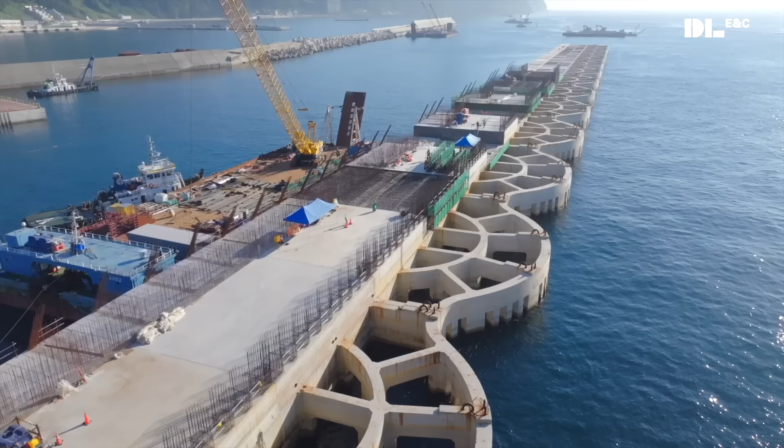Connected to Sadong Port in the south, the airport will be just an hour's flight away from anywhere in Korea, making day trips to and from Ulleungdo a reality. Visitors will have easy access to its pristine beauty, while locals enjoy greater convenience in their daily lives.

But it won't be easy. Ulleungdo is a volcanic island surrounded by steep cliffs that plunge into the sea. It's one of the most challenging terrains for construction work. So how can they possibly build an airport here? The solution came from DL E&C. Lee Soo-hyung is one of the designers behind the plan.

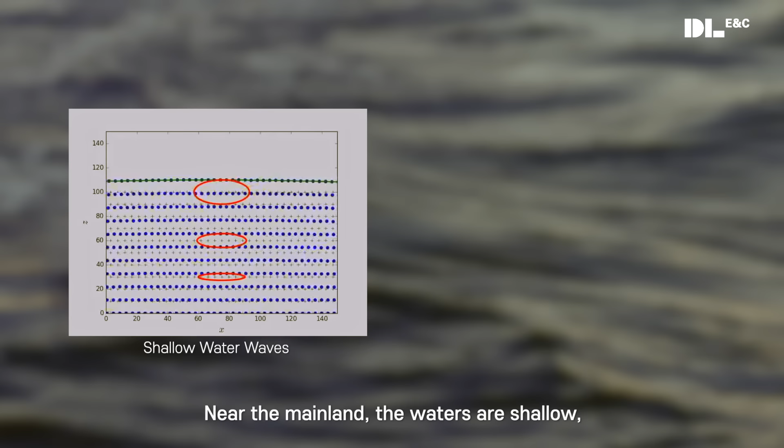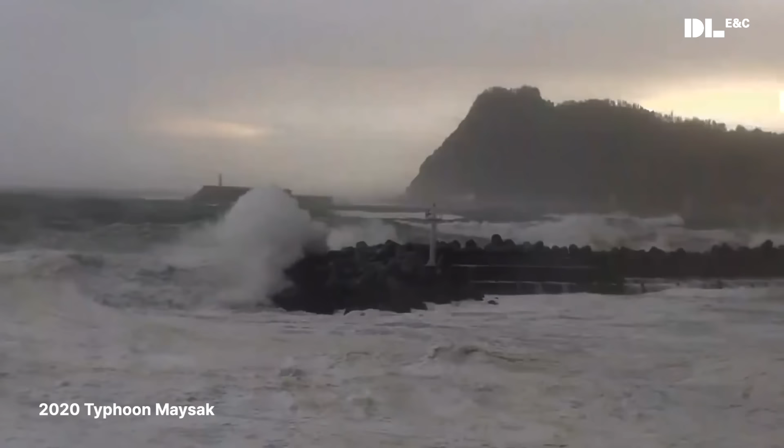This became apparent during the 2020 typhoon when Ulleungdo saw the highest recorded waves in 100 years.

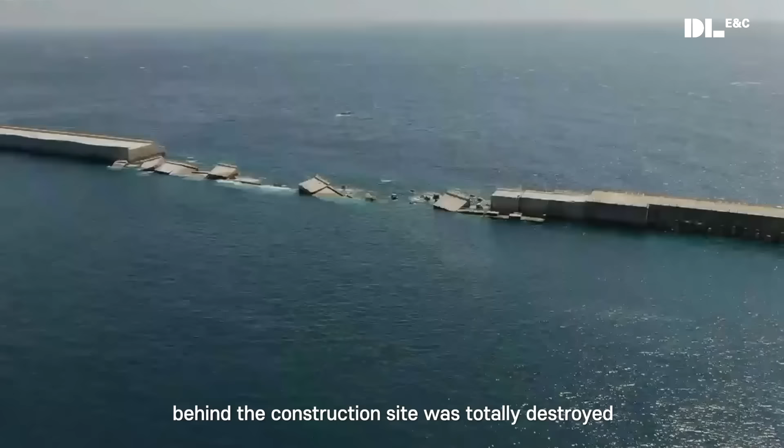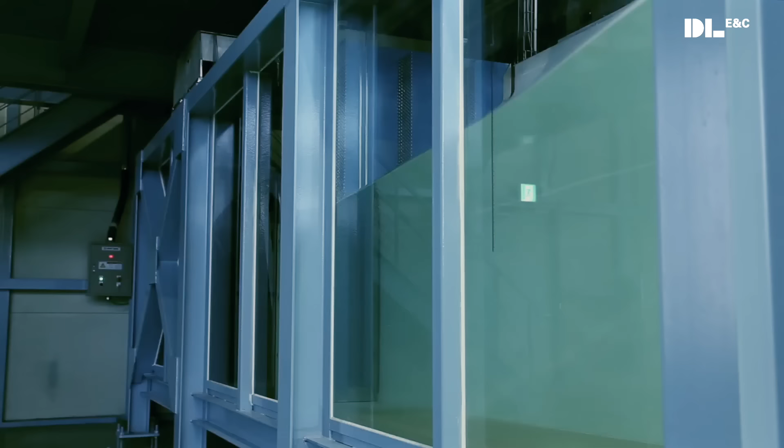The waves swept a 50-ton tetrapod inland, blocking a tunnel. Plans had to account for Ulleungdo's uniquely challenging topography. The design team conducted seawater model tests to develop defenses capable of withstanding massive waves.

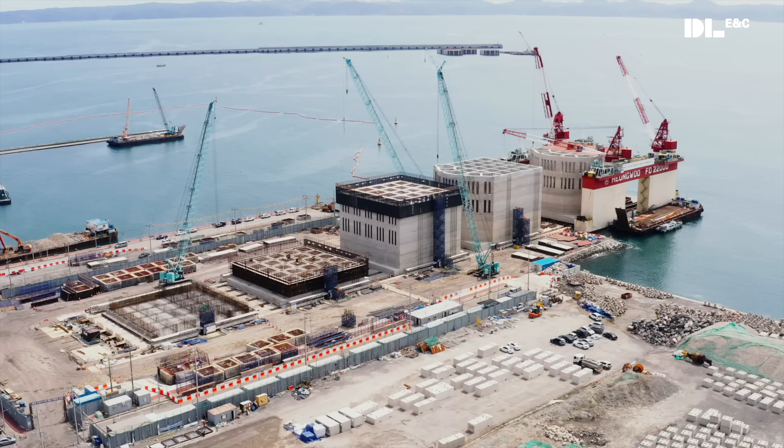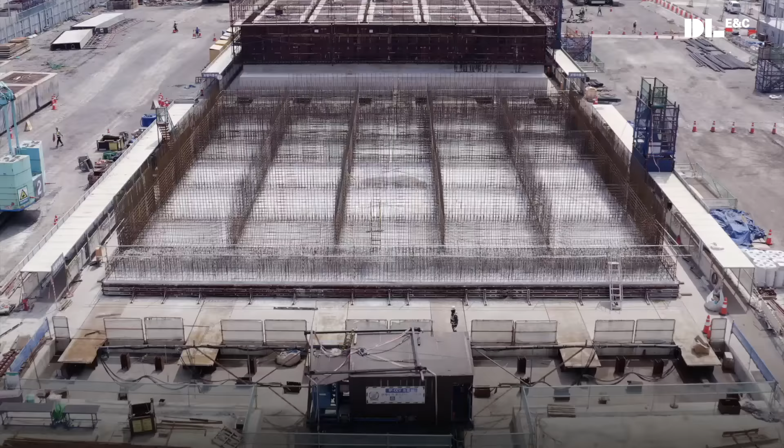Yeongilman, Pohang. This is where the caissons designed to withstand such massive waves are built. A caisson is a concrete structure used in port construction. Ulleung Airport will require a total of 30, with the largest equal to the size of 3 10-story apartment buildings.

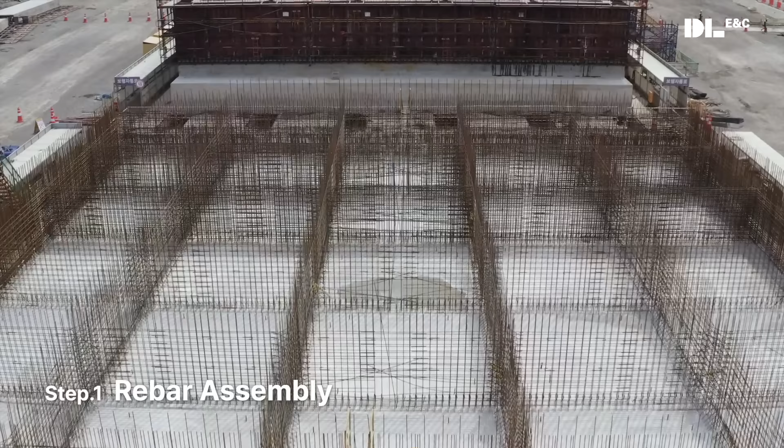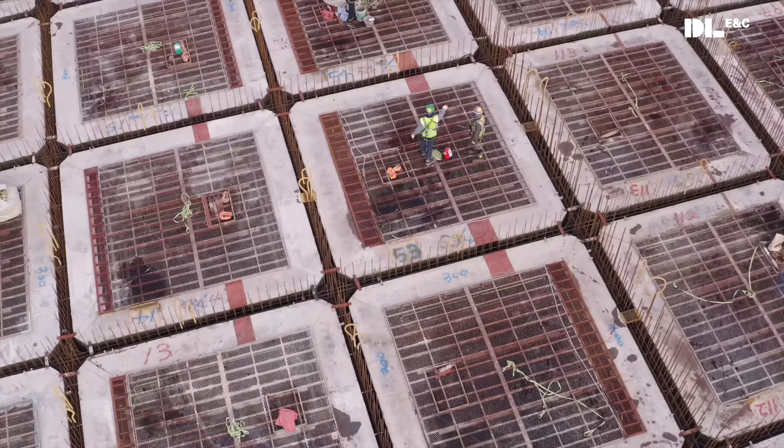So how exactly are they made? The first step is rebar assembly. This forms the caisson's basic structure like a skeleton. Then it's time to install the formwork, a mold used to pour and set the concrete. Once the formwork is in place, they pour in the concrete. Given the scale, the amount of concrete needed is staggering.

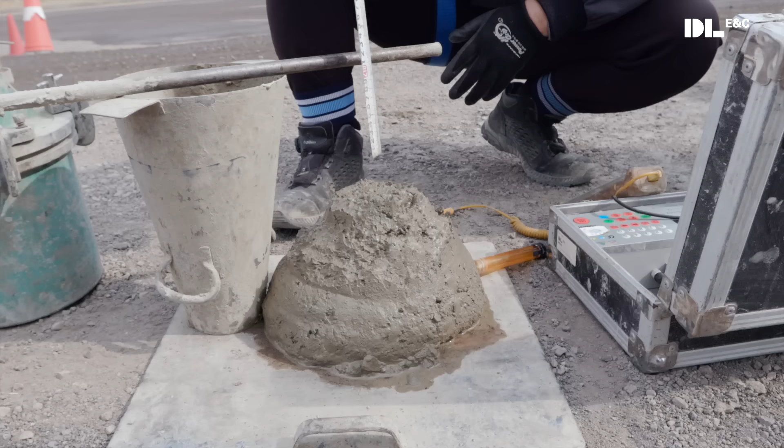The concrete is tested before it is poured. 네, 레미콘 슬럼프는 합격입니다. The consistency of the concrete is crucial to its strength.

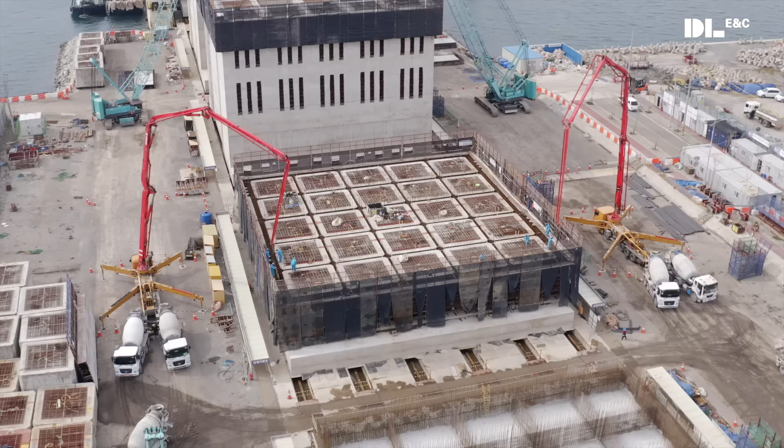After the tests, the pouring begins. Although the caissons are built on land, they are transported by sea and sunk into place. And even minute cracks can impact durability. Moreover, to withstand extreme waves, strict quality control is a top priority.

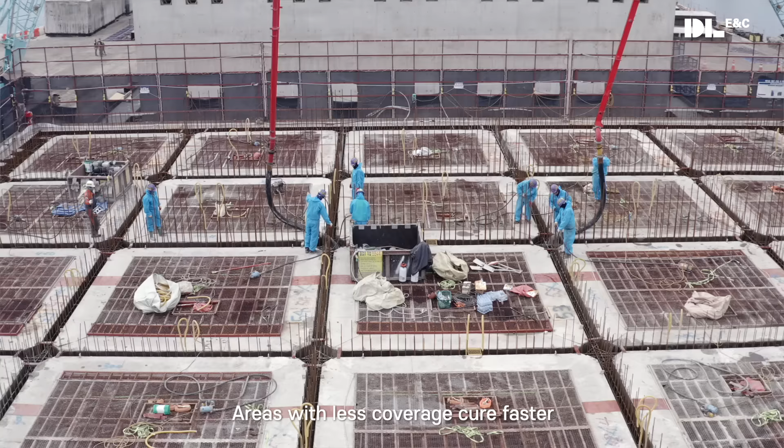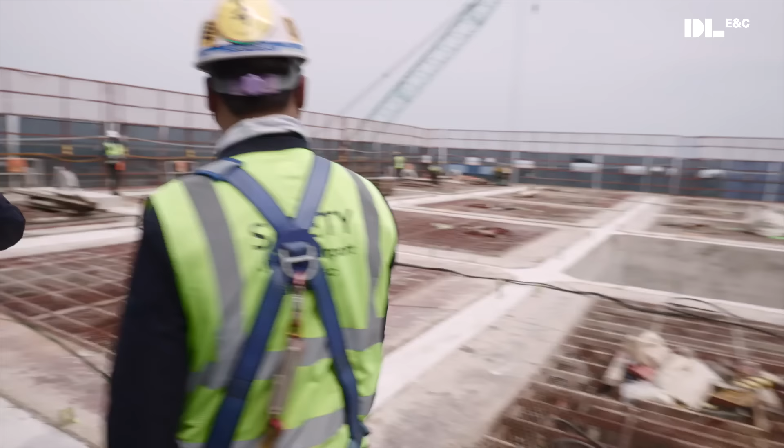It takes 2 large pumps a whole day to pour enough concrete to fill a single level. The concrete takes about a week to solidify during the curing process. Once completed, the formwork is ready for removal.

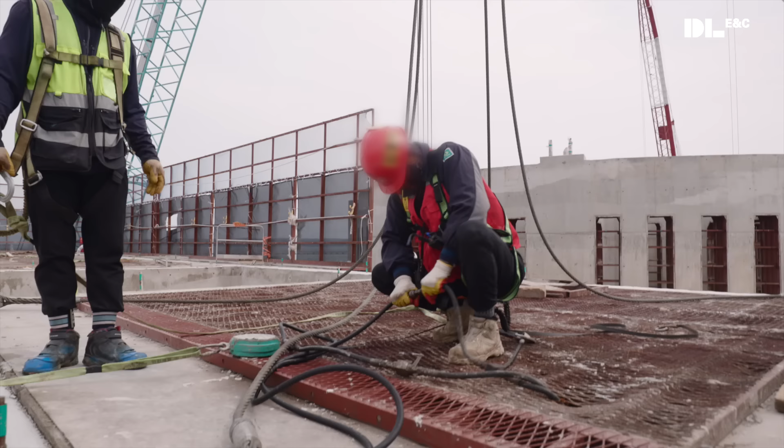The formwork is connected to cables and moved by the crane. Lifting the large, heavy structure requires constant vigilance. Unfortunately, the winds are picking up.

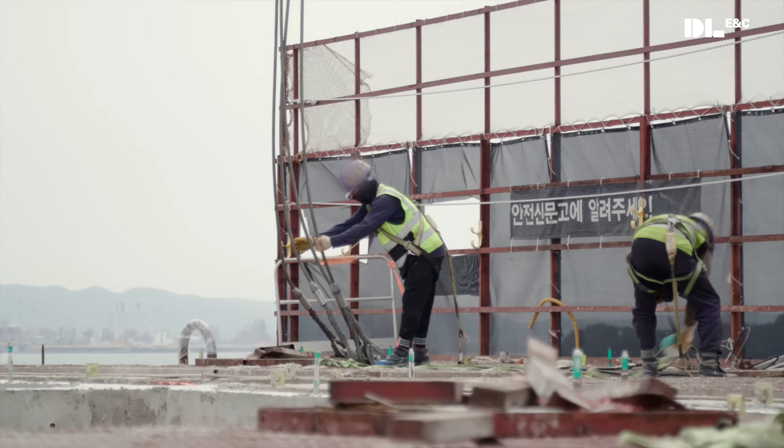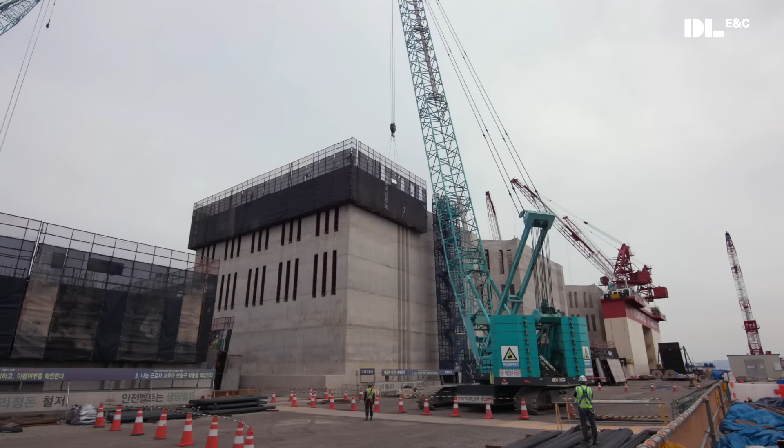For now, the work is put on pause. Two hours later, the winds subside and the formwork removal continues.

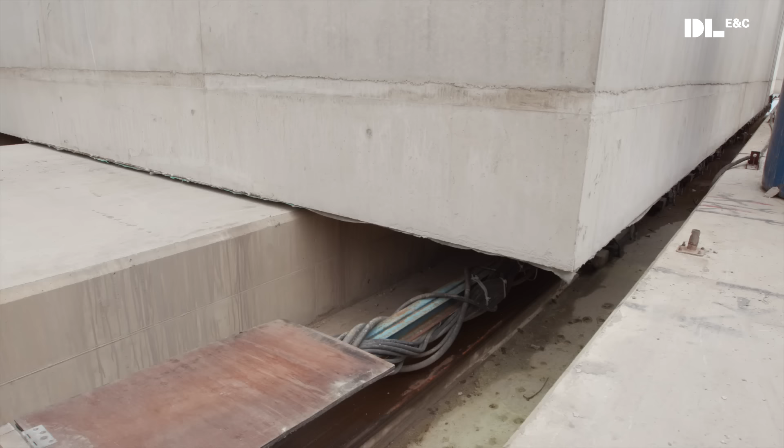Weather is the first factor to affect operations. Today, the caisson must be moved to the sea. It will be loaded onto what's called a floating dock. But how do you move a 16,000-ton structure? The answer is the individual pushing caisson carrier vehicle.

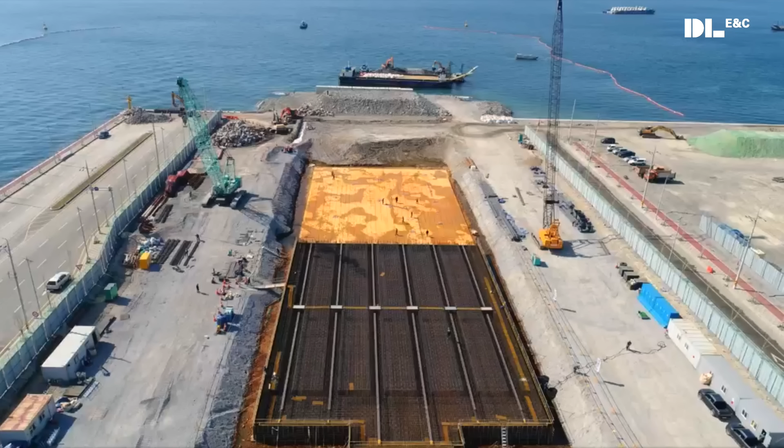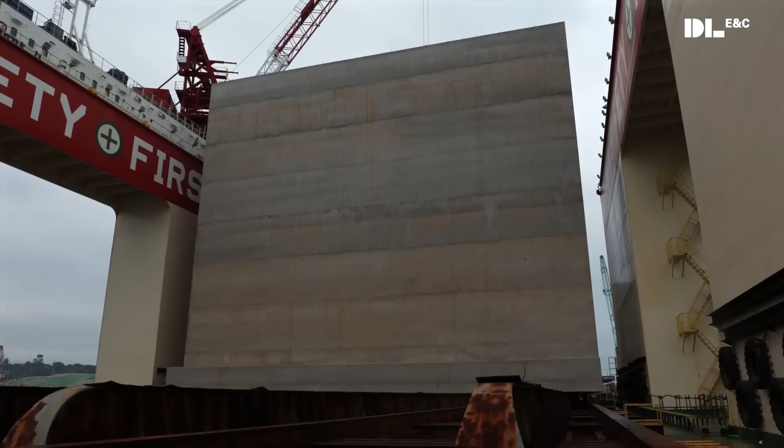Rails are laid on the floor before the caisson is built. On them, 96 hydraulic jacks are installed. Each can lift and move 250 tons. So, 96 jacks can transport a 16,000-ton caisson. At a speed of 10 meters per hour, it takes about 4 hours to move the caisson 40 meters.

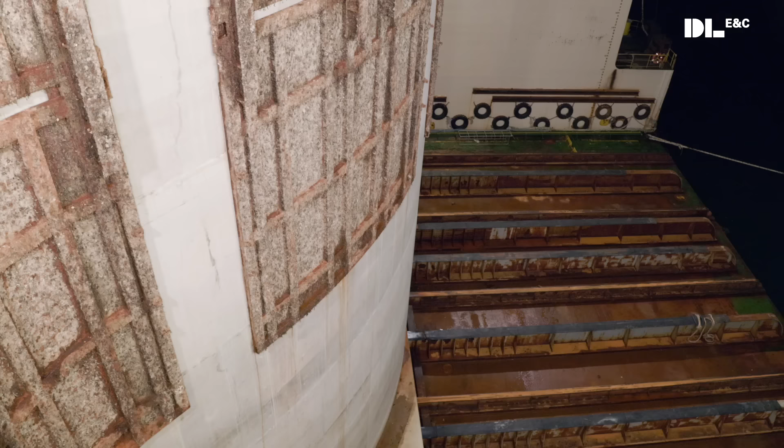4 a.m. the next morning. The floating dock carrying the caisson prepares to depart. This is the 21st caisson transport, but the team never lets their guard down.

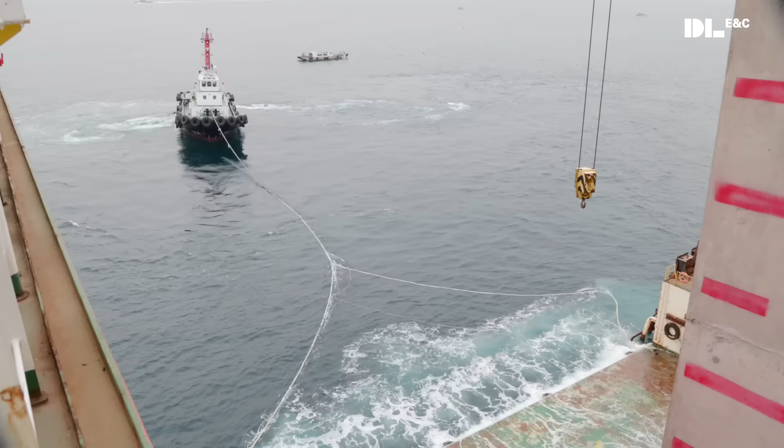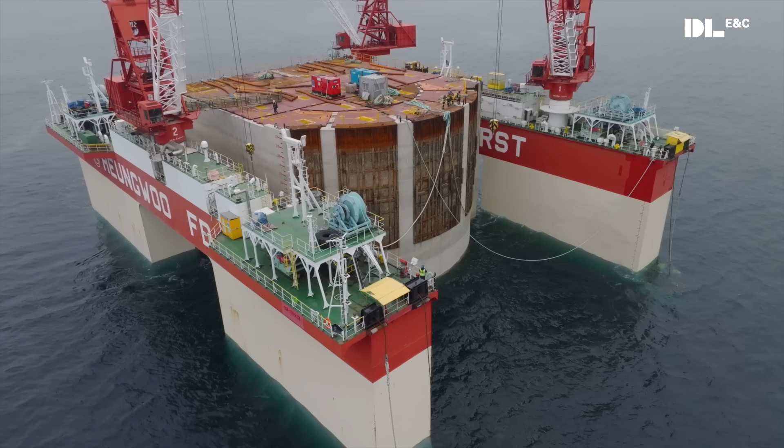Dawn. Out in the deep waters, the caisson sinking begins. This process involves filling the chambers with water, causing it to sink under the weight. Once the caisson is stabilized, the tugboats guide it out to sea.

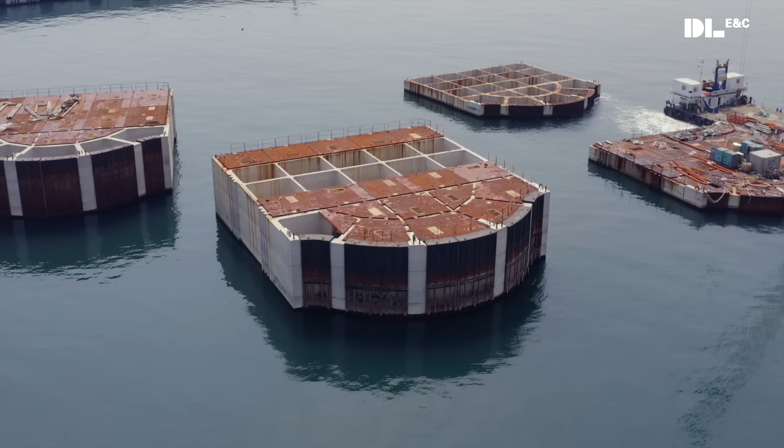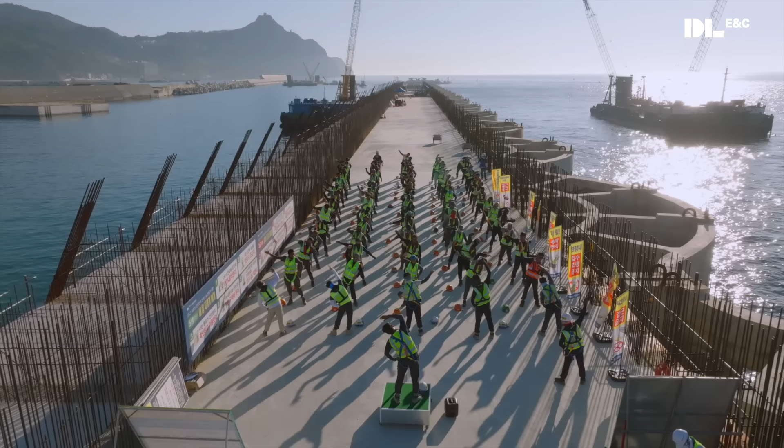From there, it is transported to a staging area protected by the breakwater, where the caisson awaits its final journey to Ulleungdo. At the same time, 210 kilometers away, the Ulleungdo construction site is also off to a busy start. The work here takes place at sea rather than land, so safety inspections are crucial.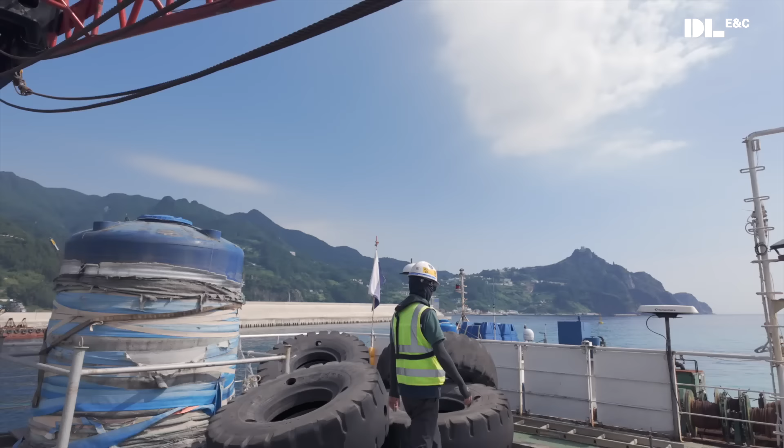First, the placement of the base stones. Stones about 30 centimeters wide are laid on the seabed 30 meters deep to strengthen the ground.

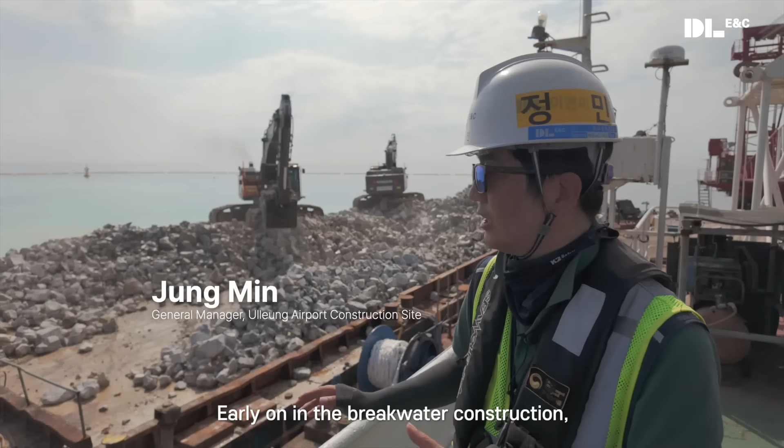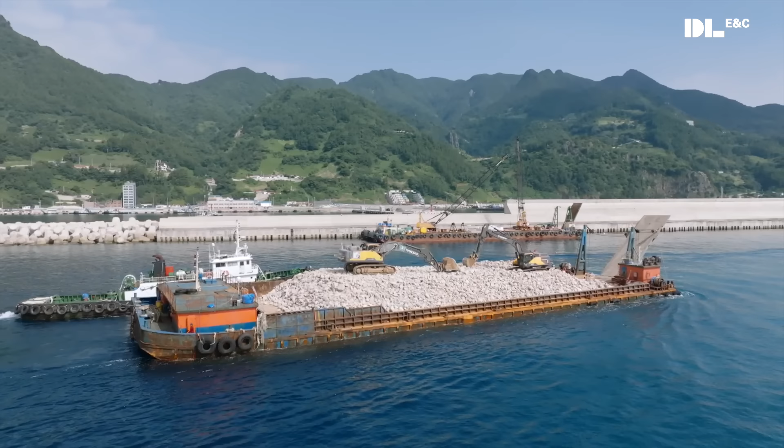To support the 16,000-ton caisson, the base stones must be dropped at precise locations using GPS. A single caisson requires the even distribution of 60,000 tons of stones. Once the caisson is placed on the base stones, the next step is stacking much larger stones on top.

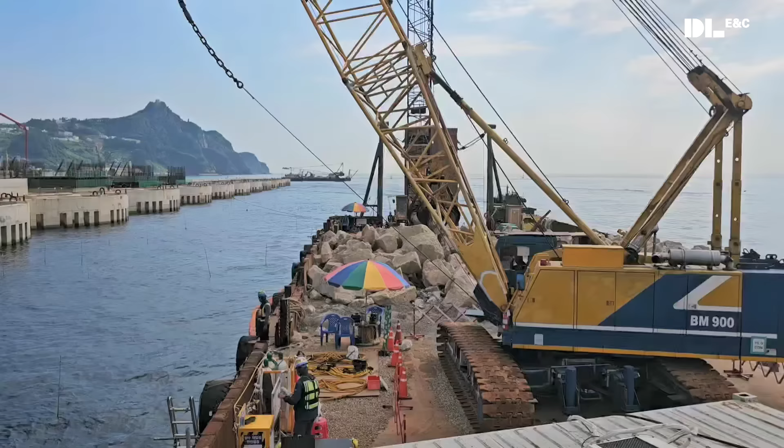The stones are dropped by the crane, one by one. This part of the process calls for someone special. Divers. The armor stones sit atop the 30-centimeter base stones around the caisson.

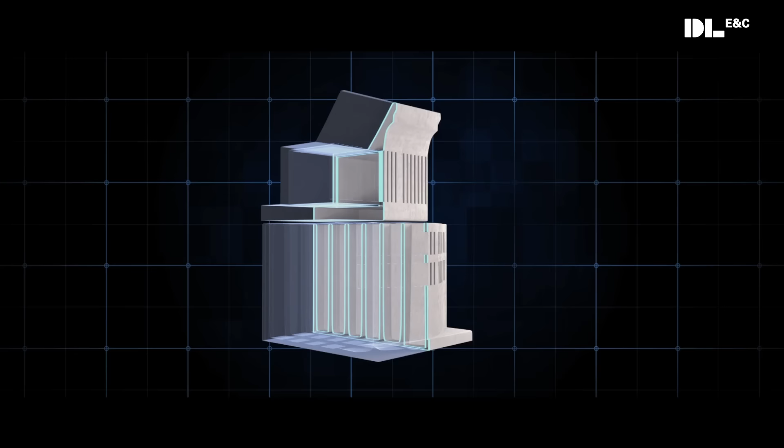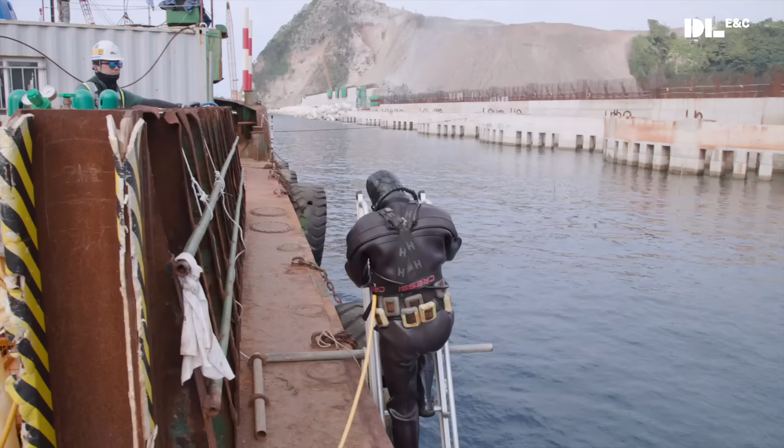The diver ties the armor stone with rope and coordinates with the crane operator to make sure the stones fit closely together with no gaps. Four divers are on the job daily, each working 1-hour morning and afternoon shifts, in line with safety protocols.

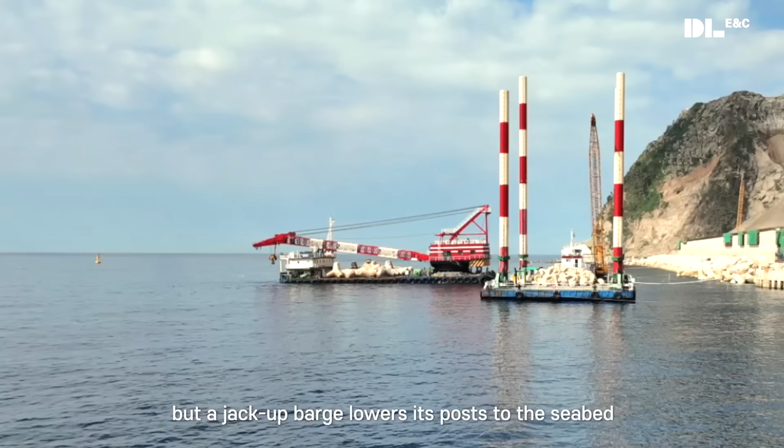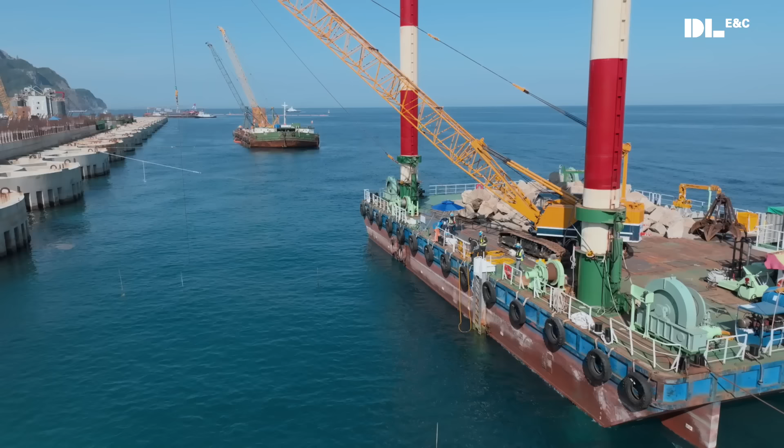With 50-meter tall posts, the jack-up barge can operate in depths of 35 meters. Anchor blocks are stacked next to the caisson, and an extra layer of anti-erosion blocks are stacked on top of the armor stones. Only then is the offshore process complete. At every step, the forces of nature come into play.

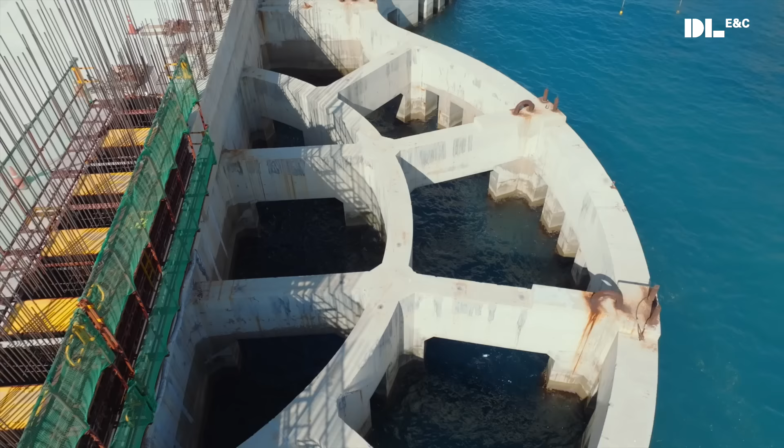The caissons for Ulleung Airport are curved. They're designed that way to dissipate the force of the waves from different directions.

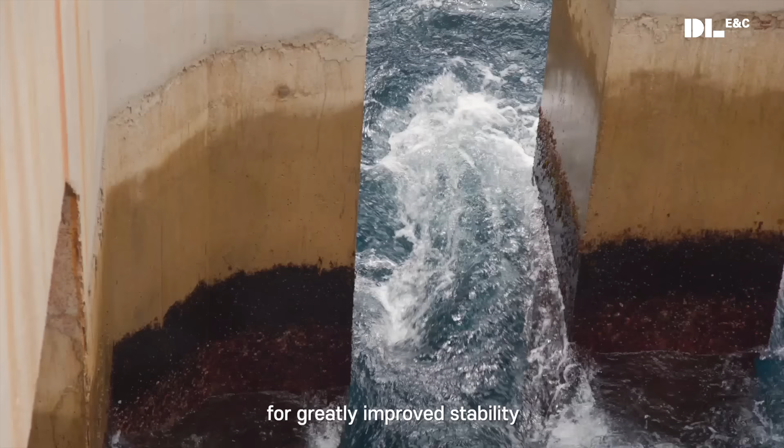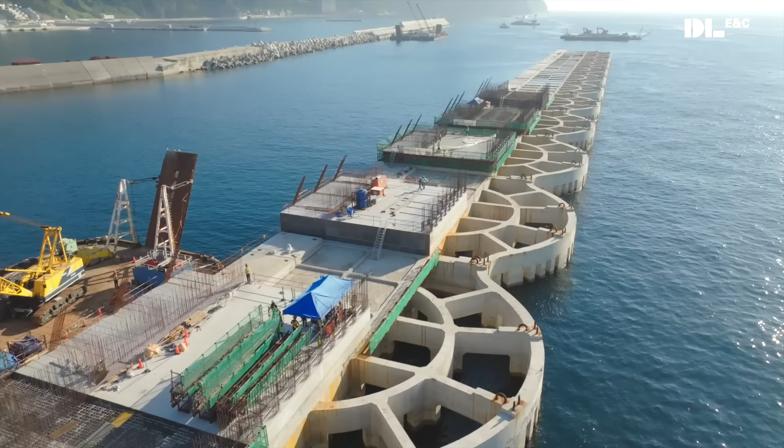The caissons are filled with seawater and soil and sealed with a concrete lid. Then comes the capping concrete to form the foundation for the breakwater.

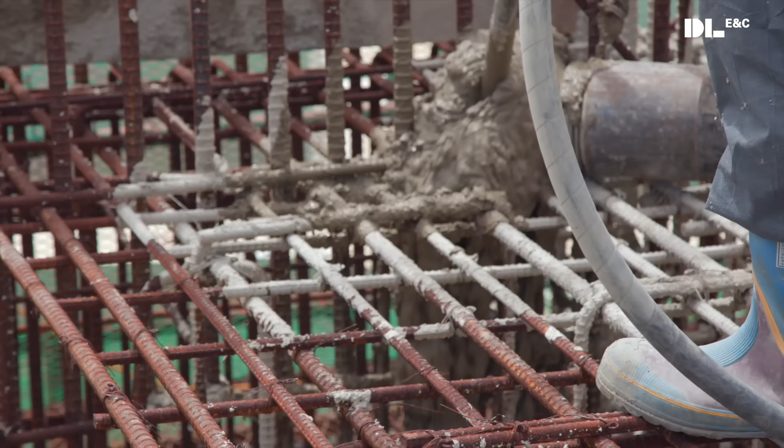The wind isn't the only obstacle.

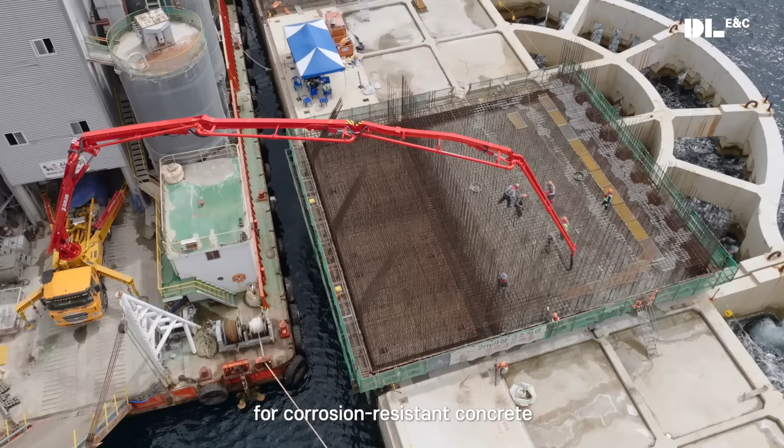As for the capping concrete, it's poured intermittently in a method called interval construction.

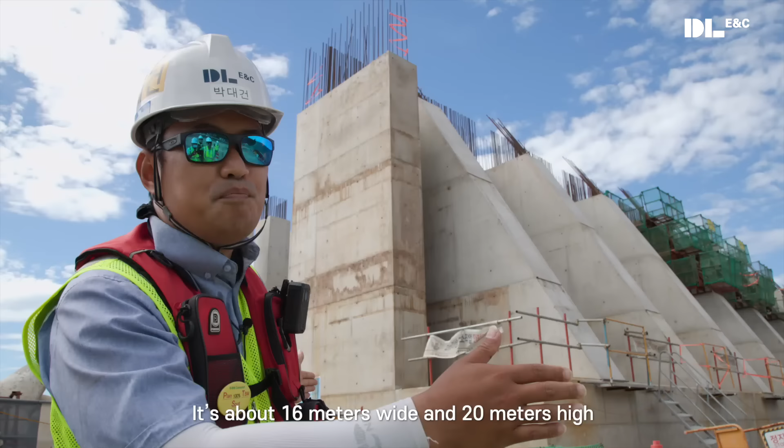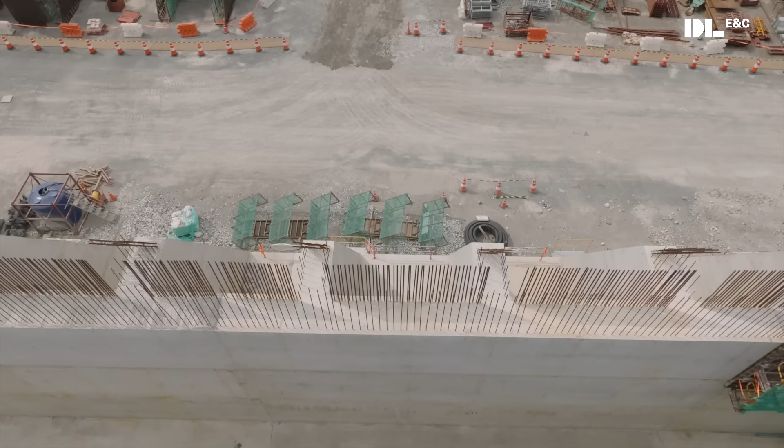This wall is designed to block waves as high as 24 meters. That's 5 meters more than the record high waves of Typhoon Maysak in 2020. The design is focused on protecting the runway from overtopping waves and dissipating their force.

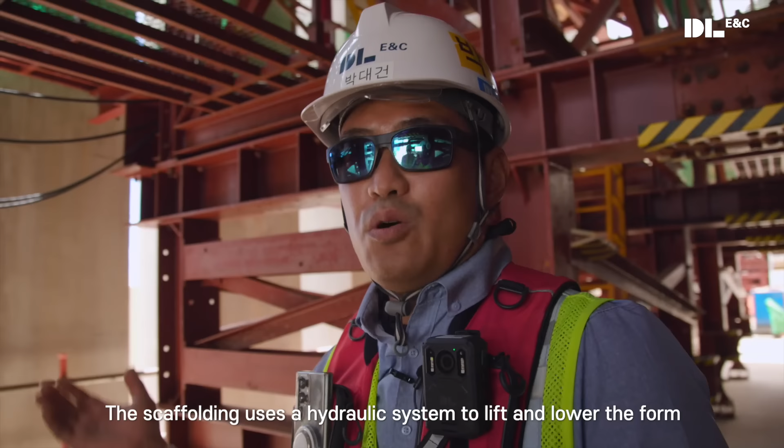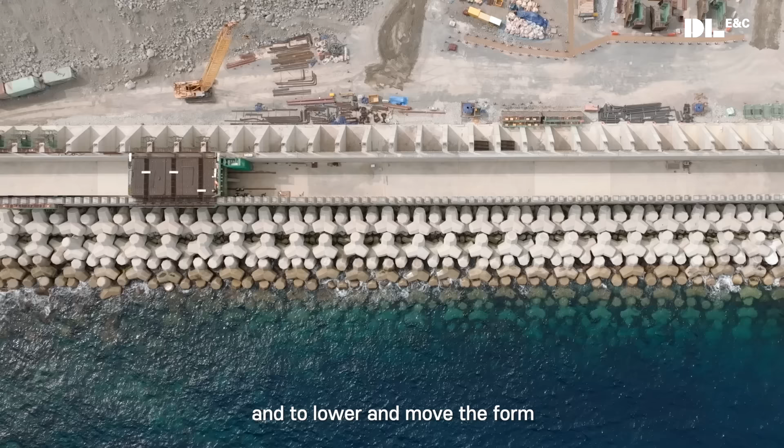Once the slab is finished, the outer walls are raised and the inner space is filled with rocks and soil to create the runway. The materials for this reclamation are sourced in Ulleungdo and crushed on site.

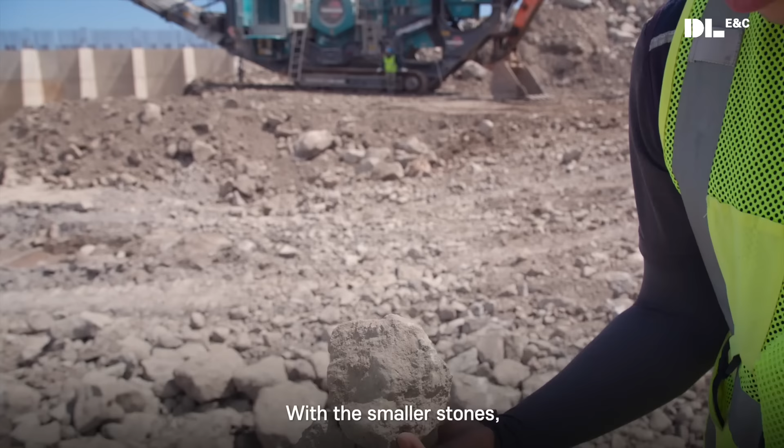Crushed stones are sorted by size using a screener and used in various processes as required.

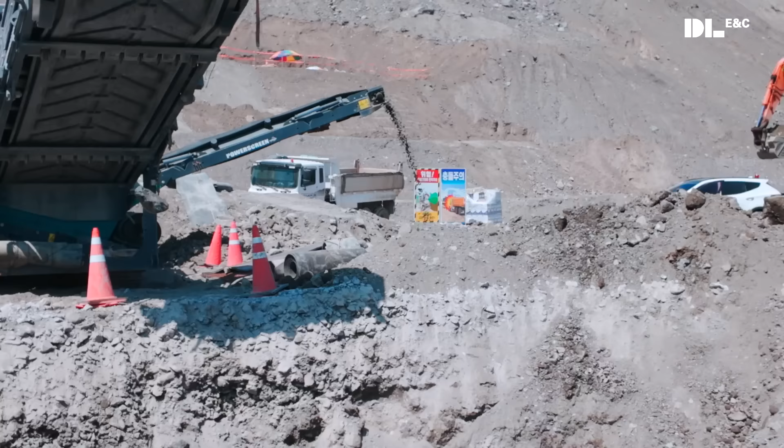The large 30-centimeter stones are used as base stones for caissons in the sea. The medium stones are used for filling, while the stone powder, similar to soil, is used for compaction.

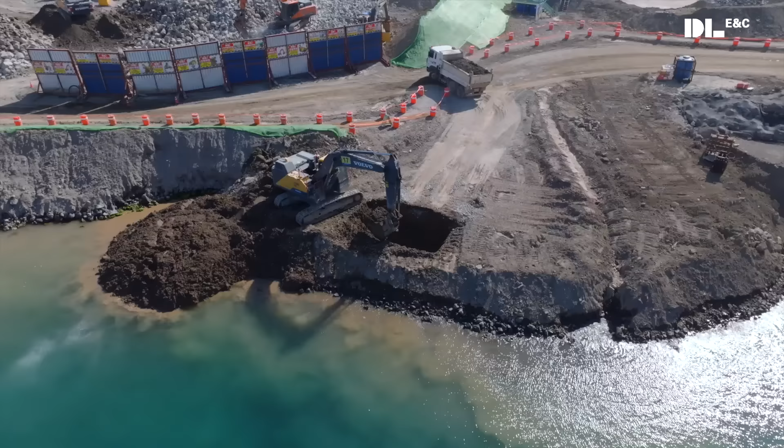During the construction of Incheon Airport, the average depth of the reclamation site was 1 meter. Here, it's over 20 meters, with areas as deep as 27 meters. The level of difficulty is worlds apart.

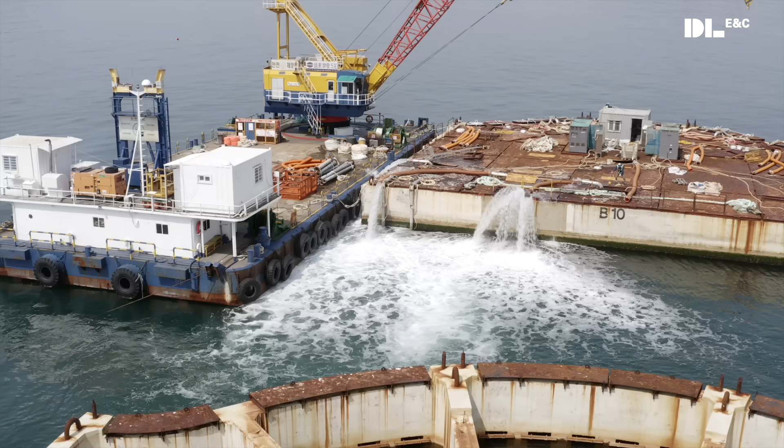The staging area off the coast of Pohang. Preparations for moving the caissons are underway. First, the water used to sink them must be drained.

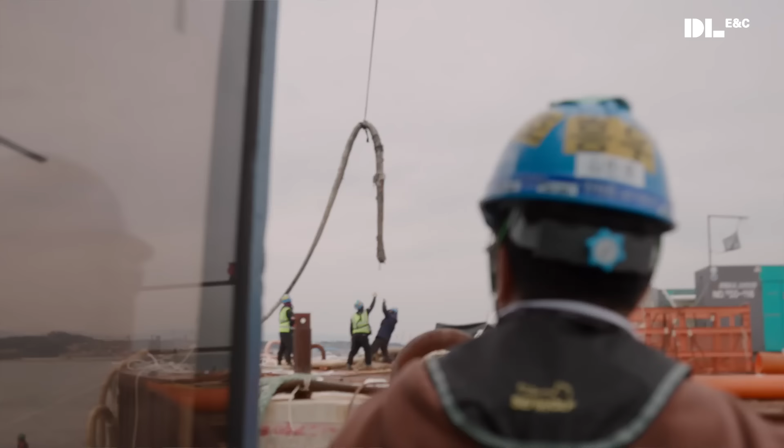Once the caisson is hooked up to the tugboat, the towing process begins. The tugboat leads from the front while an auxiliary boat maintains balance and direction from behind.

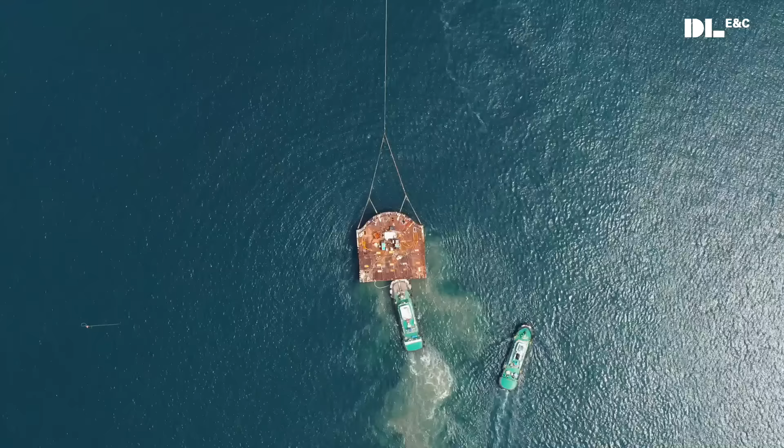Next day at the construction site of Ulleung Airport. Fortunately, the weather is fine. To move the caisson, both Pohang and Ulleungdo must have at least 3 days of good weather. But on the mercurial East Sea, such days are rare. The tension doesn't ease until the caisson's arrival.

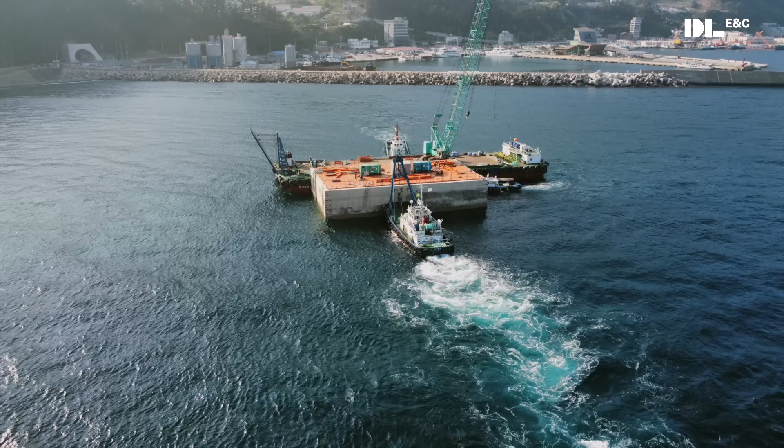May 21st, 2022. The arrival of the first caisson in Ulleungdo is a historic milestone in linking the remote island to the mainland via the new airport. So far, 20 caissons have been installed. Today, the 21st caisson will be laid as the challenge of paving a new airway continues.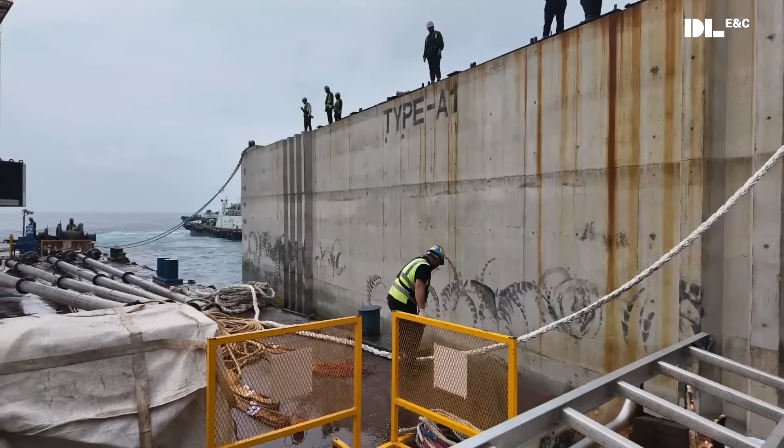6 ships were mobilized for the operation. Dozens of workers work seamlessly together. While positioning Caisson 21, they drain the water to match its height with Caisson 20. The installation process alone takes 7 hours. With the 21st caisson secured, 9 remain. Obstacles may arise, but there will be no giving up.

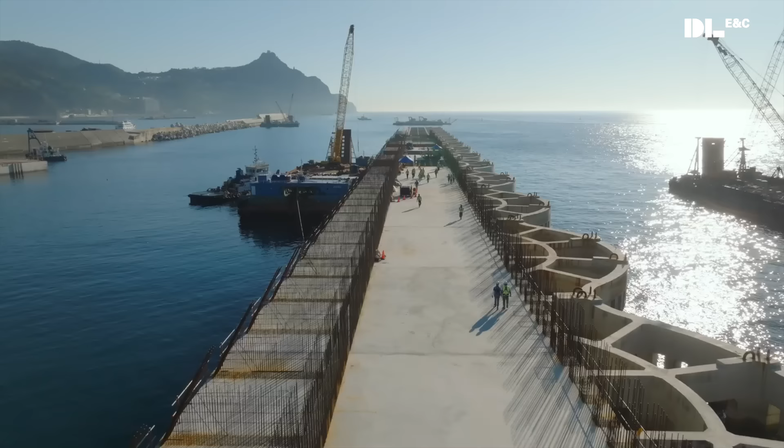DL E&C is leading the way with its cutting-edge technology to usher in a new era for Ulleungdo.